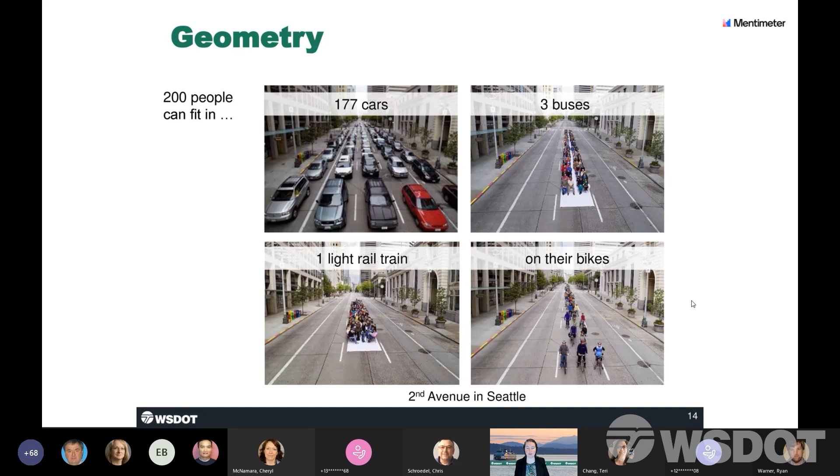Motor vehicles are by far the least spatially efficient form of transportation. All other forms of typical land-based transportation can move the same number of people in significantly less space.

Because of this geometric inefficiency, providing infrastructure that makes driving the most appealing option ironically pits drivers against everyone else who is now compelled to drive due to a lack of other options. Even in corridors with relatively high productivity of other modes, vehicle congestion is psychologically dominant because cars take up so much space.

Another issue with overdependence on driving is all the people who are left behind. There have always been people who are excluded from driving due to age, disability, or cost. These people are often shut out from access to education, employment, healthcare, healthy food, social connections, and more when the main means of access is driving.

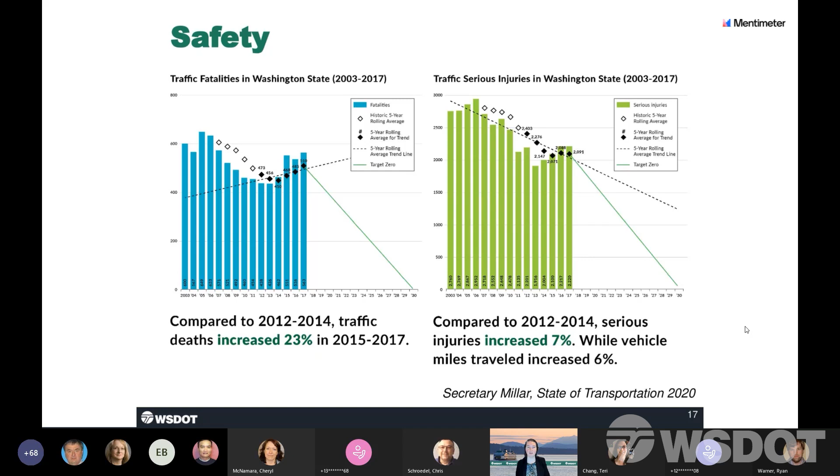Our current vehicle-dominated transportation system also exacts a heavy cost and loss of life. In Washington, hundreds of people are killed by motor vehicles every year. This intersects with equity because those killed are disproportionately people outside of vehicles. In Seattle, for example, only 7% of crashes involve vulnerable users, but vulnerable users make up 89% of people killed.

Speeding is a fundamental factor in this. Statewide, 86% of pedestrians and bicyclists killed occurred on roads with a posted speed limit over 25 miles per hour, between 2010 and 2019.

This loss of life has a huge financial impact. Add to that the cost to build and maintain roadways, parking facilities, vehicles, and fueling systems, and it's clear the auto-dominated transportation system is a very expensive way to provide access.

The economic burdens of auto reliance extend to local communities. On a per acre basis, transportation efficient development, where customers are less diluted by the land demands of large roads and parking lots, has significantly higher economic productivity. This in turn can provide more tax resources for local governments.

Finally, transportation is the single largest source of climate destabilizing greenhouse gas emissions in Washington. Locally, pollution and habitat fragmentation generated by the highway system degrade the health and abundance of natural ecosystems and their native species. The fish passage barrier removal injunction is one example where WSDOT is now working to correct past impacts.

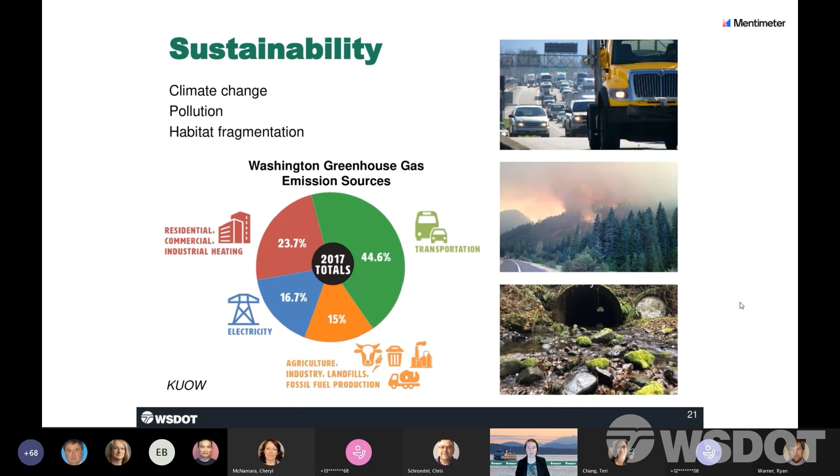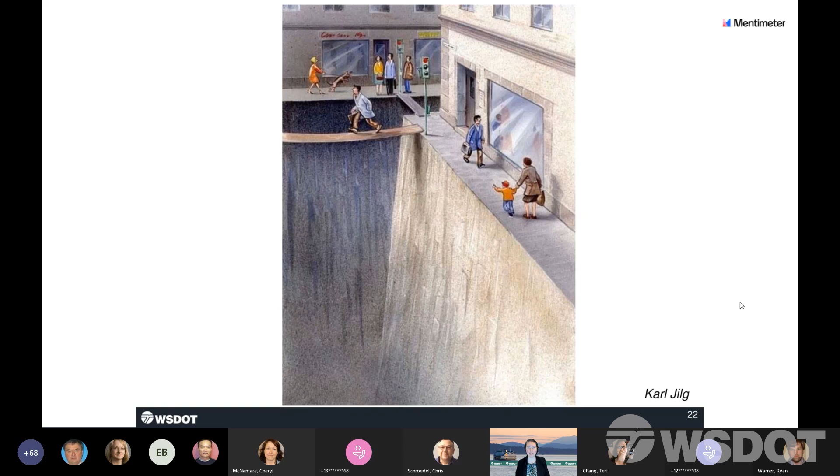Unfortunately, in our efforts to help people drive farther, faster, we've created a lot of places that feel like this.

We can join the global trend and flip our orientation to focus first on creating access through proximity at a human scale.

There are a wealth of local, national, and international examples where the trend lines of population and vehicle growth have been decoupled by shifting which modes form the foundation of the transportation system.

Washington's continued population growth means that development has the opportunity to transform much of our built environment. When land use and transportation are built for humans, not private vehicles, then access and mobility can increase without commensurate growth in vehicle travel.

Transportation trends are made up of the aggregate individual decisions of all the people traveling in our state. People make choices based on their perceptions of the options reasonably available to them and the relative risks and merits of those options. For walking, bicycling, transit, and other more sustainable options to be competitive, there need to be complete networks for these options that are safe and comfortable, and destinations need to be within convenient travel time for each of these options.

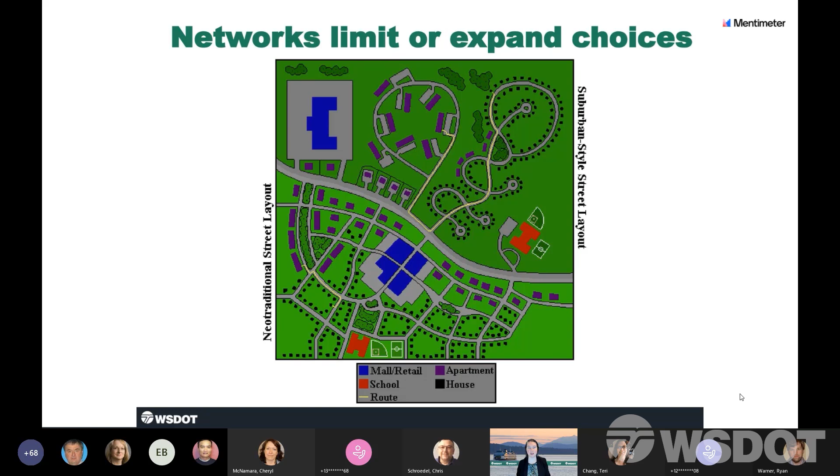In summary, transportation efficient communities provide proximity of destinations, where the locations of different types of uses are designed to maximize the number of people who have the option to live, work, learn, recreate, and meet their daily needs within a walkable neighborhood. Complete, low-stress multimodal networks that provide direct, safe, convenient, and welcoming systems of walkways, bike routes, and transit routes. Appropriate roadway characteristics for context and function, so that vehicle facilities are designed to be appropriate to the places they traverse.

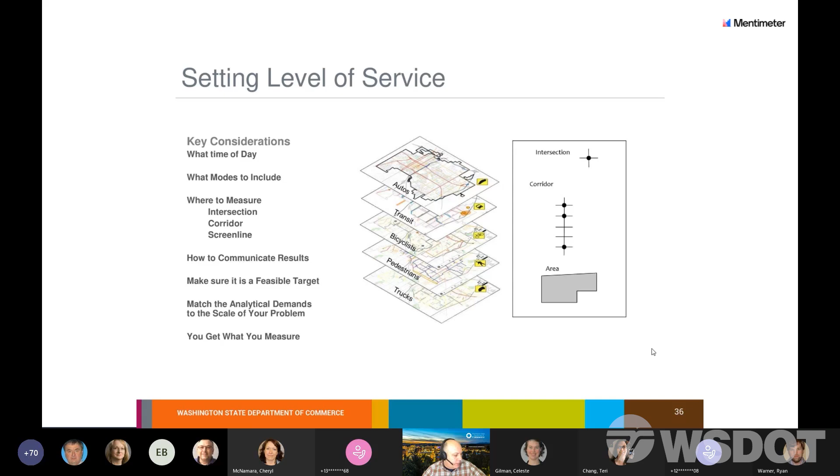The next requirement I want to talk about is the identification of system needs. It's really a question of where do projects come from. As you're developing a transportation element, or a capital facilities element, you need an identification of system needs -- this is where you say, here's what we need to build, or accomplish, over the next 20 years in order to realize our growth strategy.

It's a combination of existing deficiencies, which you get from your inventory, your goals and policies, and external mandates -- for example, the Americans with Disabilities Act says you've got to have curb cuts.

That's a deficiency in the existing system. A new stormwater manual comes out, and your roads are not managing stormwater the way the new manual calls for. That's an existing deficiency, okay?

The other thing you've got to do is maintain the system you already built. So you've got an asset management system, and it says this is the schedule you need to optimize system preservation. That's going to generate system preservation needs.

And then you've got the needs resulting from new growth. That comes from the level of service you've set, your traffic forecast, and your land use system. All of these things combined generate the system needs, and those needs are going to be met through a combination of capital projects, programs you develop, and regulations you develop.

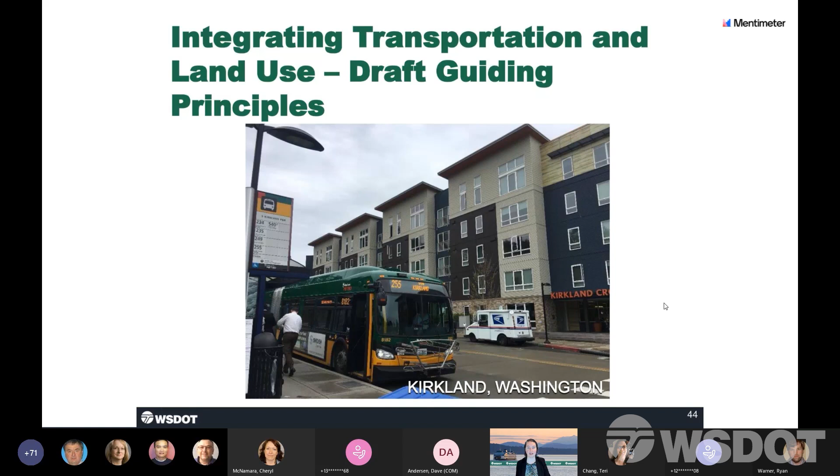Principle 1, remove barriers to infill development. Encourage development that adds to the diversity of origins and destinations. Partner with cities, counties, the Department of Commerce, other state agencies, tribes, and others to proactively remove barriers to adding housing, employment, and services within existing developed areas. For example, by removing requirements for motor vehicle infrastructure, such as parking, vehicle lanes, highway capacity manual level of service mitigations, etc., and through strategic management of curb space. Next slide.

2, reduce environmental and health disparities. Prioritize transportation investments that reduce disproportionately high and adverse human health and environmental effects against historically overburdened communities and vulnerable populations. Harms include exposure to air pollution and other environmental pollutants, crash exposure, disproportionate policing, and restricted access to high-quality employment, education, healthy food, healthcare services, safe housing, arts and culture offerings, and social opportunities necessary to achieve optimal health outcomes. Partner with others to pair provision of affordable housing, transportation options, and anti-displacement actions with investments. Next slide.

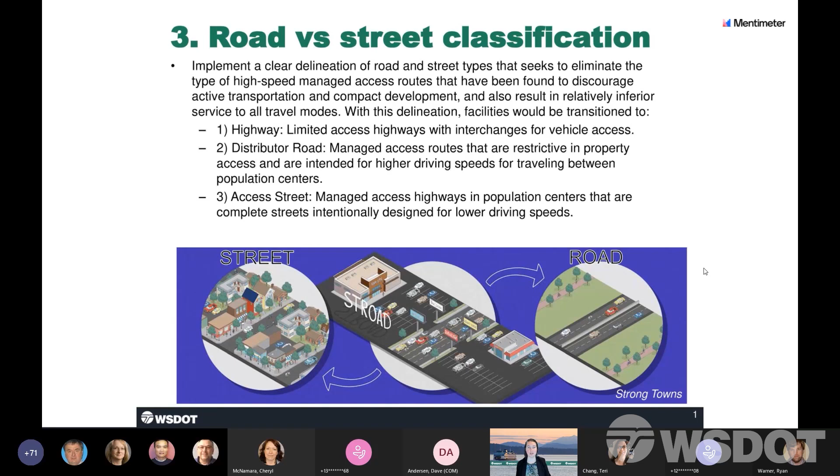3, road versus street classification. Implement a clear delineation of road and street types that seeks to eliminate the type of high-speed managed access routes that have been found to discourage active transportation and compact development and also result in relatively inferior service for all travel modes. With this delineation, facilities would be transitioned to: 1, highway, limited access highways with interchanges for vehicle access; 2, distributor road, managed access routes restrictive in property access and intended for higher vehicle speeds for traveling between population centers; 3, access street, managed access highways in population centers that are complete streets intentionally designed for lower vehicle speeds. Next slide.

4, implement the state's safe system approach. Implement an approach to providing and maintaining transportation facilities that acknowledges death and serious injury are unacceptable, that humans are vulnerable and make mistakes, and takes a proactive approach that incorporates redundancy. On access streets, take proactive measures to encourage lower driving speeds. On distributor roads, provide a greater level of separation and/or barriers to protect vulnerable users. Next slide.

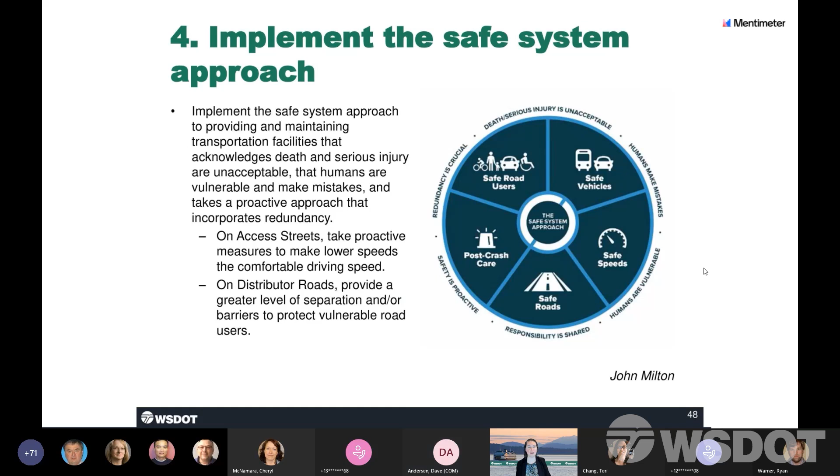5, complete active transportation networks. For all highway projects, including fish passage barrier removal projects and resurfacing projects, identify missing active transportation network links, whether absent or not maintained and operated to encourage safe use, as baseline needs, and improve the active transportation facilities.

Next slide. 6, invite active trips. Maximize walking, rolling, and cycling trip making by providing active transportation facilities that provide users with a low level of traffic stress in accordance with agency policy, such that the performance outcomes are: accessible, designed in accordance with the ADA; cohesive, where all links in the vicinity of the project are present and each provides the appropriate level of traffic stress; direct, avoiding any significant out-of-direction travel for all active transportation modes; safe, developed in accordance with safe system principles; and comfortable and attractive, shaded and shielded by trees, with pleasant noise levels and air quality, and visually interesting settings. Next slide.

7, prioritize transit, HOV, and freight. On all highway types, prioritize the reliability of transit, high occupancy vehicles, and freight over general purpose travel. Avoid increasing risk to vulnerable users by over-designing for large vehicles. Transit functions best when it can quickly and reliably serve destinations located along a linear path, short travel time apart, and surrounded by a high-quality active transportation network. Freight has specific needs that should be considered and addressed, including freight parking, protection of industrial areas from incompatible uses, and reducing the risks of conflicts with vulnerable users. Next slide.

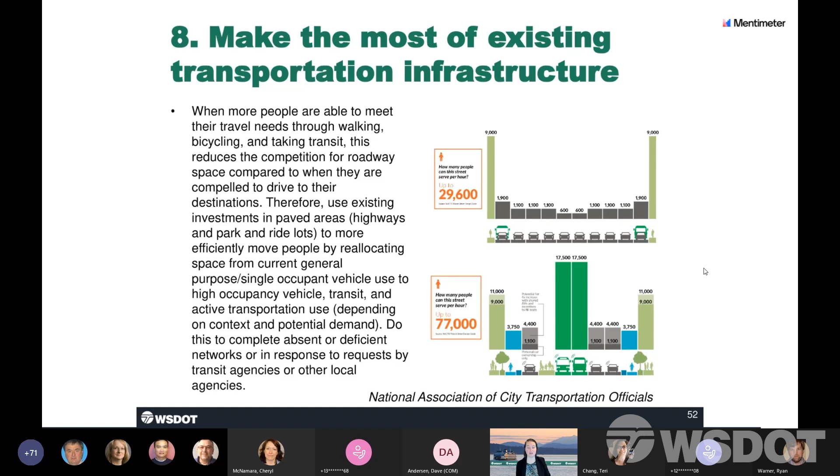8, make the most of existing transportation infrastructure. When more people are able to meet their travel needs through walking, bicycling, and taking transit, this reduces the competition for roadway space compared to when they are compelled to drive to their destinations. Therefore, use existing investments in paved areas, highways, and park and ride lots to more efficiently move people by reallocating space from current general purpose and single occupant vehicle use to high occupancy vehicle, transit, and active transportation use, depending on context and potential demand. Do this to complete absent or deficient networks or in response to requests by transit agencies and other local agencies. Next slide.

Facilitate utilities that communities need. Work with utility providers to advance transportation efficiency and incentivize compact development.

Per RCW 47.44.160, develop a dig once policy that proactively provides broadband facility owners with information about planned state highway projects to enable collaboration between broadband facility owners and the department.

Minimize administrative burdens, delays, and uncertainties associated with utility permits or franchises for infrastructure upgrades in support of densification of development in existing communities to help them become more transportation efficient, and seek to integrate the development of trails that contribute to the overall plan for a complete active transportation network into utility projects and corridors.

Next slide. And this is the 5th video in my Strong Towns series. You don't need to watch the others to understand this one, but it might provide some context.

If you live in the US or Canada, this will certainly look familiar to you. Multiple lanes of car traffic, wide highway-sized lanes, giant signs, traffic lights, parking lots, lots of driveways and side streets with traffic merging in and out, and a place that's nearly impossible to cross as a pedestrian. There isn't even a sidewalk here. These are what Strong Towns refers to as stroads, which is a horrible name, and that's intentional because these are horrible places.

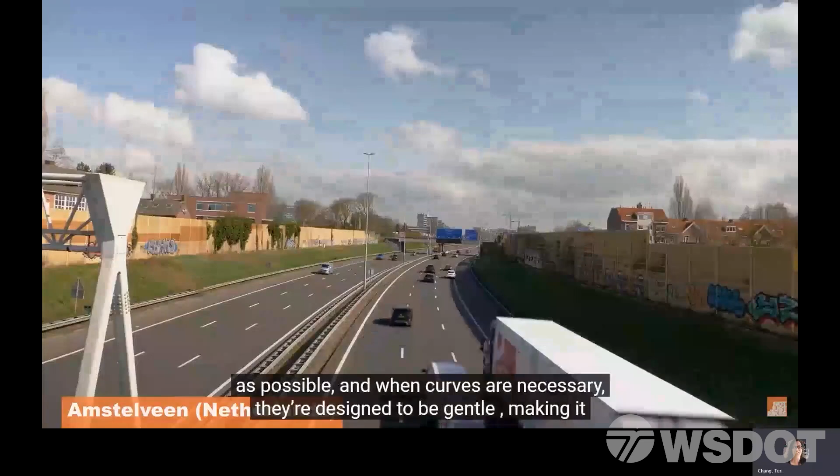This is a road. It is a high-speed connection between two places. Because of the high speeds involved, there are several safety features. The lanes are wide and forgiving so that vehicles do not bump into each other. The road is as straight as possible, and when curves are necessary, they're designed to be gentle, making it easy to drive along. The area next to the road, called the clear zone, is free of any obstacles that could be hit, just in case a vehicle runs off the road.

The signs are very large, designed to be read from a distance and at high speeds. Entrances and exits are few and far between because the road is designed to keep vehicles at a high speed for as long as possible to minimize travel times. Roads are important. We need roads, though I personally prefer my roads to have rails.

This is a street. It is a complex environment where life in the city happens. Buildings are placed right next to the sidewalk to be easily accessible by people walking, and it gives a sense of space, almost like an outdoor room. This is a place that feels comfortable to be in, so you find people here.

There are many entrances and exits to and from the street, and there may also be street parking for vehicles and deliveries. This is an environment meant for slow speeds because this is a destination, not a thoroughfare. High-speed traffic is not compatible with lots of human activity, so vehicle speeds are reduced.

Everything on the street is at a human scale. It's designed to be inviting, encouraging people to walk, to window shop, or to just sit and watch the world go by. The street is designed to get the most value out of the space available. Streets are very important, and we definitely need streets.

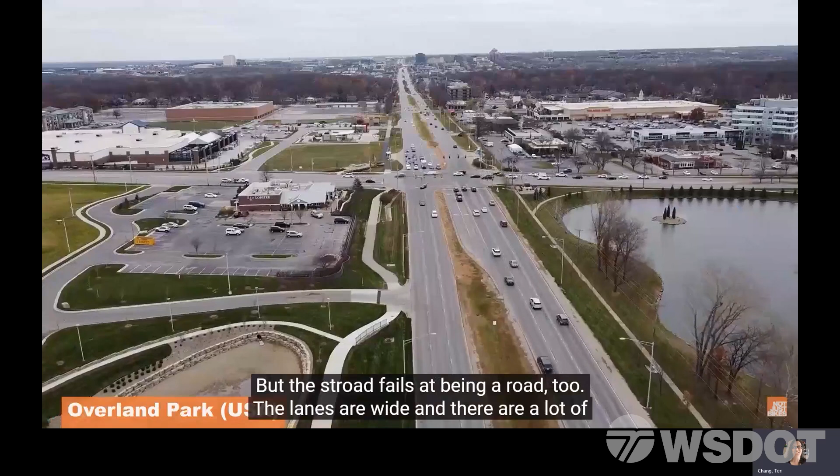But the stroad fails at being a road too. The lanes are wide and there are a lot of them. You're surrounded by asphalt, but you can't actually get anywhere quickly like you can with a road. There are cars constantly changing lanes and going in and out of the stroad, slowing down traffic and introducing many points of conflict that require drivers to constantly slow down to avoid a collision.

Traffic volumes can be quite high on stroads because there are no viable alternatives to driving. Distances are too far to walk and it's too unsafe to cycle. And since public transit gets stuck in traffic anyway, only the poor and the desperate will take the bus. So everyone drives. But because there are so many crossroads, entrances, and exits to the stroad, traffic lights are required, meaning drivers are constantly stopping at red lights. And because speeds are high, light timings need to be very long, leading to traffic signal-induced congestion. Nobody is getting anywhere quickly on a stroad.

All of these elements make stroads unsafe as well, and the majority of fatal crashes within cities happen on stroads. They are especially dangerous to people walking and cycling.

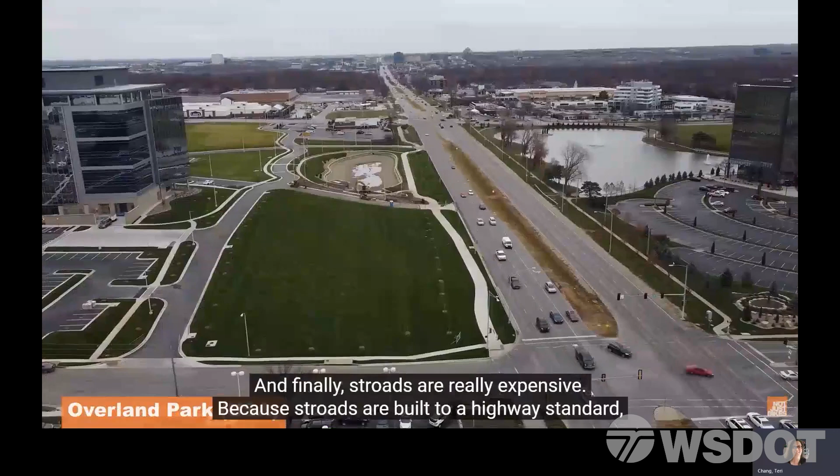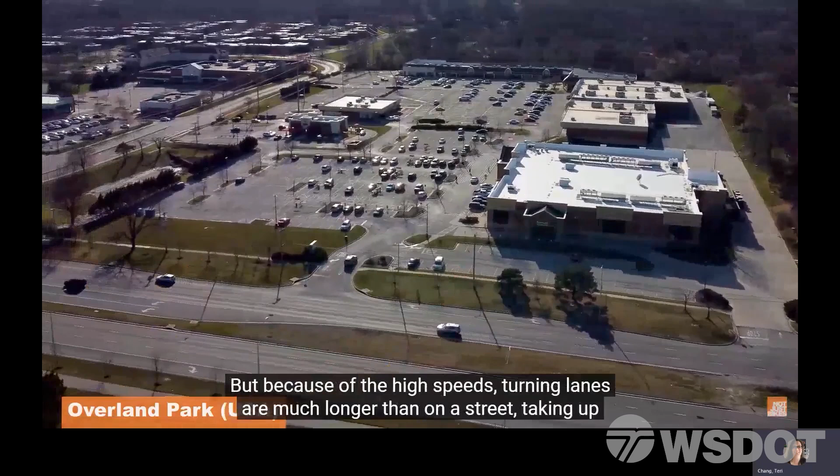And finally, stroads are really expensive. Because stroads are built to a highway standard, their lanes are very wide and there are never less than 4 lanes. Plus, there's normally extra space for shoulders and clear zones at the side of the road too. Because stroads try to be streets, there are many entrances and exits, so many turning lanes are required. But because of the high speeds, turning lanes are much longer than on a street, taking up even more space.

And as traffic increases even more, due to traffic entering and exiting the stroad, the city will install another traffic signal for $750,000. All of this means that a stroad is much bigger than a road that would carry the same amount of traffic, and significantly larger than a street that would have the same number of businesses and houses along it.

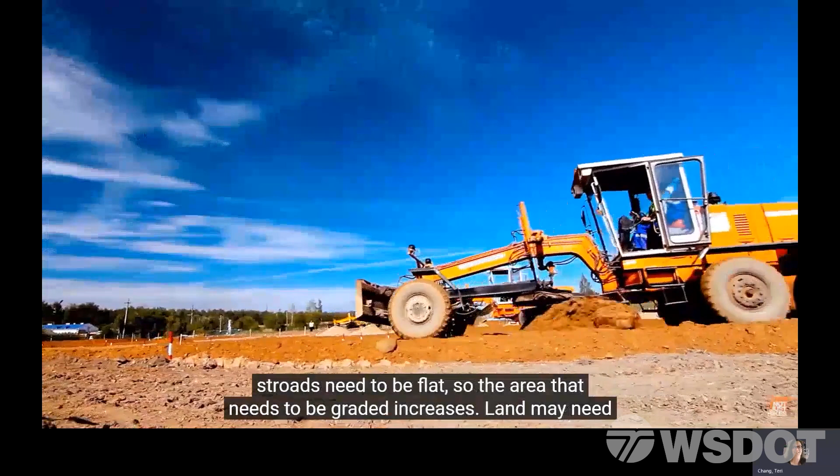As the size of the stroad increases, there are several other costs incurred. High-speed stroads need to be flat, so the area that needs to be graded increases. Land may need to be purchased from residents to widen the stroad and destroy their property values. By the way, do you think this girl is waiting to cross this 5-lane stroad?

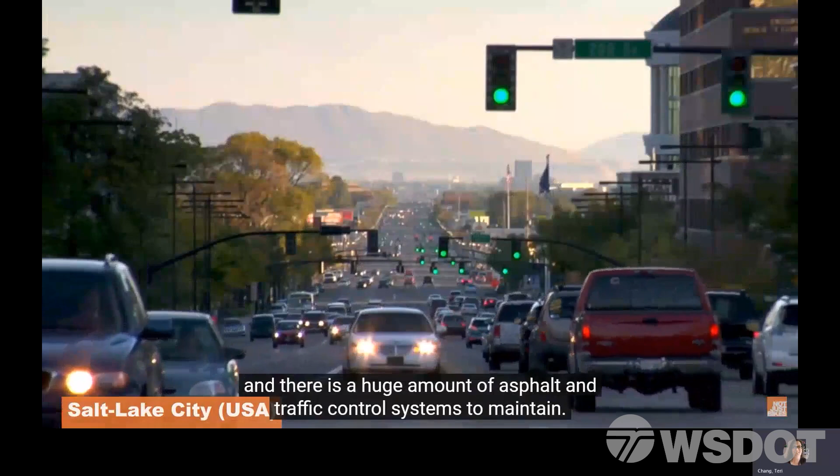Flood protection infrastructure becomes much more expensive due to the impermeable surfaces, and there's a huge amount of asphalt and traffic control systems to maintain. And of course, because everyone drives, large parts of the landscape need to be dedicated to parking lots, meaning everything is inherently spread out in low density. Parking lots don't employ anyone, and they don't earn much tax revenue either.

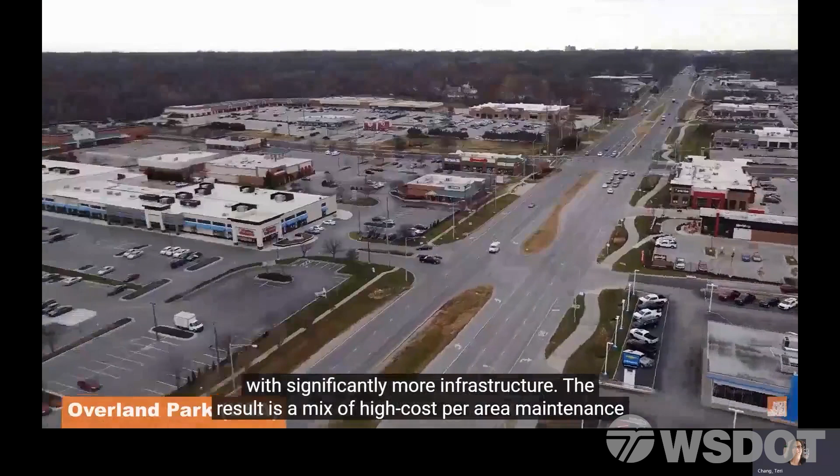A stroad environment is significantly less financially productive than a street, but with significantly more infrastructure. The result is a mix of high cost per area maintenance expenses combined with low value per acre tax revenue, which makes these stroad environments a net negative for cities. These places are literally putting American cities on the stroad to financial ruin, and they're doing it while being dangerous, ugly, and ultimately ineffective at actually moving people.

The stroad fails at every metric, but it's the default setting for transportation design almost everywhere in the US and Canada. So what's the alternative? Well, Strong Towns advocates for one of two things.

First, you can convert a stroad into a road. This means limiting access to the stroad, accessing businesses and neighborhoods from side streets. Painted bicycle gutters need to be removed because moving vehicles is the primary objective of a road. People can still walk or cycle, but these paths need to be completely separated from the flow of traffic. In this way, the stroad becomes a road, a high-speed connection between two places.

The other alternative is to turn the stroad into a street. For this, the lanes need to be narrowed and parking needs to be moved to the curb or behind buildings, and the buildings themselves need to be built closer to the street. Everything needs to be brought down to a human scale, making it inviting to people and getting more value from the space available. This isn't a hypothetical, and we don't have to imagine what this would look like, because the Netherlands has already done it, just with 3 types of infrastructure instead of the 2 proposed by Strong Towns.

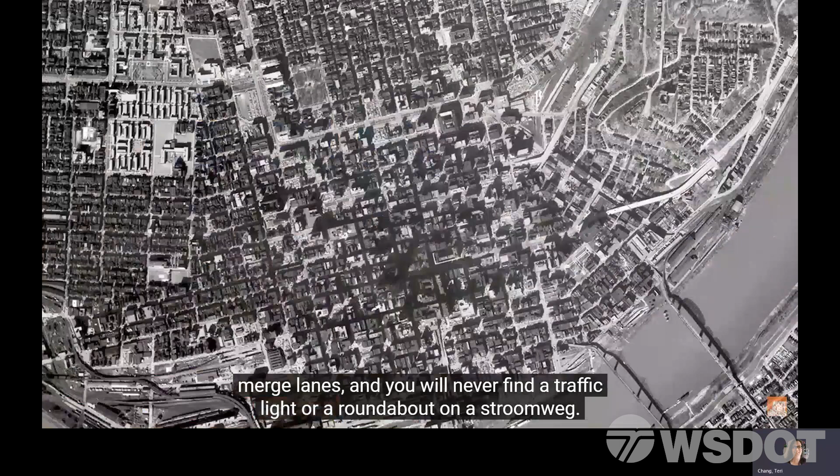Highways should also go around cities and never through cities. I'm looking at you, Cincinnati. Actually, that's not fair, because basically all American cities did this. Thankfully, the plan to do this to Amsterdam was unsuccessful.

Moving one level down is the Gebiedsontsluitingsweg, the distributor road. These are the connectors between highways and streets. There may be entrances and exits to other streets and roads, but driveways to houses or businesses are avoided as much as possible. If traffic controls are necessary, then roundabouts are preferred, unless traffic volumes require a traffic light. I'm going to refer to these as roads.

Finally, there's the Erftoegangsweg, the neighborhood access street. These are the end destinations for journeys, the places where people live, work, shop, relax, and so on. I'm going to refer to these as streets.

Streets are designed to be low speed with a speed limit of no more than 30 kilometers per hour, and they almost never have more than one motor vehicle lane per direction. In many cases, vehicle speeds are slow enough that separated bicycle infrastructure is not required, though bicycle paths may still be used to purposefully narrow the street, constraining the space available for motor vehicles.

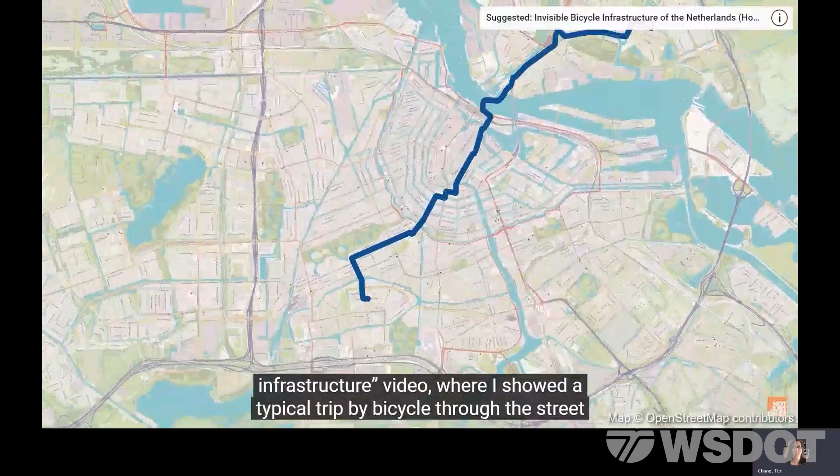The street network is designed to discourage through traffic by cars, either through traffic calming or by explicitly blocking cars, while still allowing walking, cycling, and public transit to take the most direct route. I've talked about this before in my invisible infrastructure video, where I show a typical trip by bicycle through the street network compared to the very different route by road that is taken when driving.

Once you learn about these three types of road in the Netherlands, what I'm unofficially calling highways, roads, and streets, it's really interesting to drive around and see which type you're on. This is a street. This is a road. This is a street. This is a road. This is a road with streets on either side to access houses.

Since this is a relatively recent concept, only implemented about 30 years ago, the best place to see this in action is in newer developments. Here we are driving on a road outside the town of Nieuwleusen. This road is designed to move vehicles, so there is no direct access to adjacent properties. The homes and businesses are accessed by streets on the right and left side, and the road is mostly accessed by roundabout.

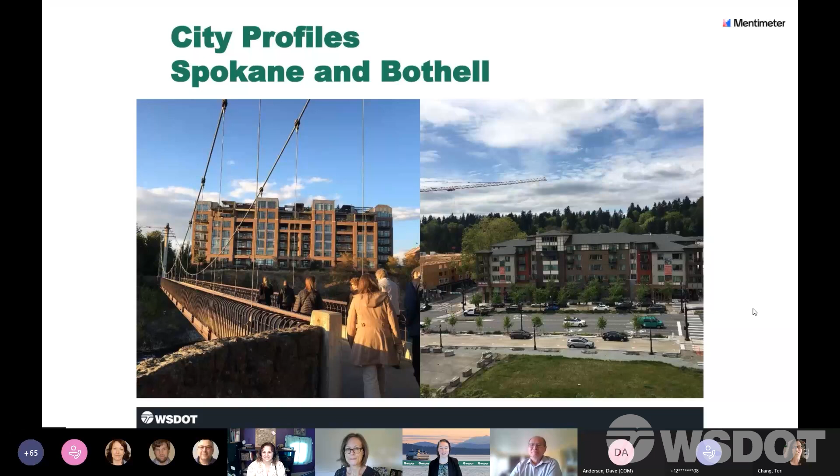Really, the presentation to this point has set up exactly what I'm going to share, a few slides and a little bit of information on the work we're doing in the City of Spokane regarding land use and transportation. We can go to the next slide.

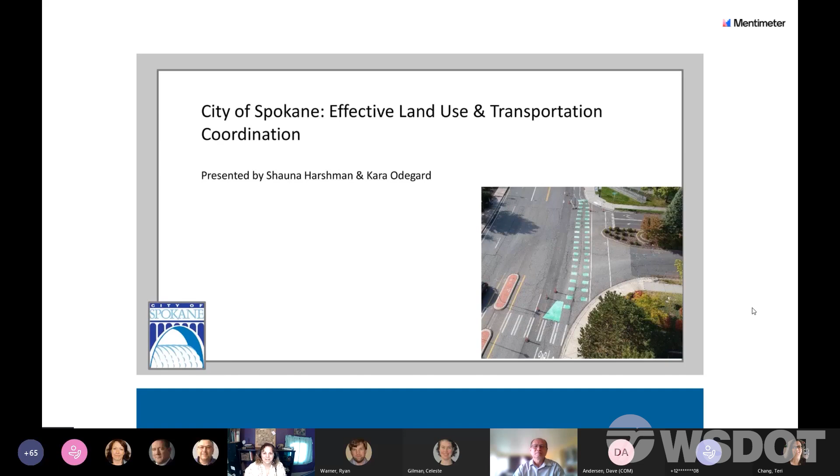Dave did a great job highlighting the nexus opportunity between those different plan types and implementation. Foundational in the coordination between land use and transportation really starts with our comprehensive plan, which adopts by reference both our master pedestrian and master bikeway plans, so we're integrating both our land use policies and multimodal transportation policies at a very high level.

So currently, the City of Spokane is focusing quite extensively on transit-oriented development. A few projects to highlight on transit-oriented design, with an eye towards complete streets, that the city is working on right now.

One on the left of this screen is the Cincinnati Greenway. The City of Spokane has been doing quite a bit more greenway work over the past 2 years with the guidance and support of our Bicycle Advisory Board, so we're really looking at integrating automobile and bicycle users of street facilities and locating those in residential neighborhoods where they make sense, paying attention to that context.

In terms of complete streets and additional coordination, I wanted to highlight one opportunity we developed downtown on Post Street, which is essentially a street used as a pedestrian alley with bollards. We often program that space, and when it's not being programmed, it's a local access street. Here's what that looks like activated.

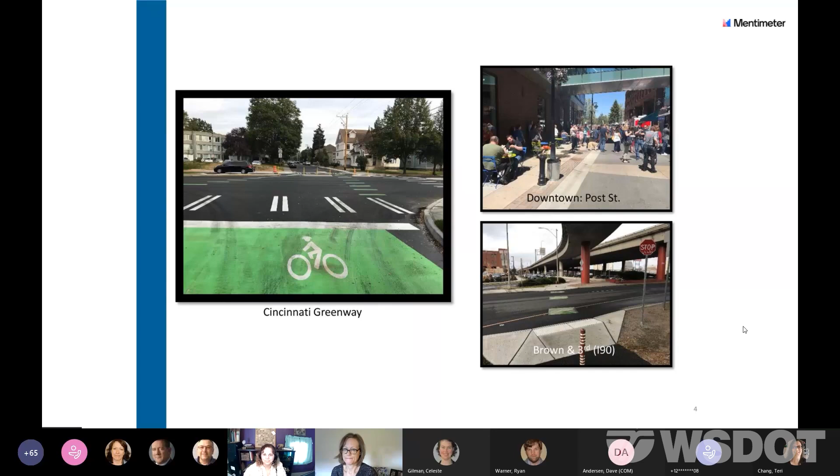We wanted to share this little piece with you, and this will be going through some modification as the City Line, the high performance, high frequency transit line through central Spokane, comes through, but that will be in the future, and we'll still maintain many of these elements. Next slide.

Could we go to the next slide? Sorry, I'm clicking, there must be a lag. That's okay.

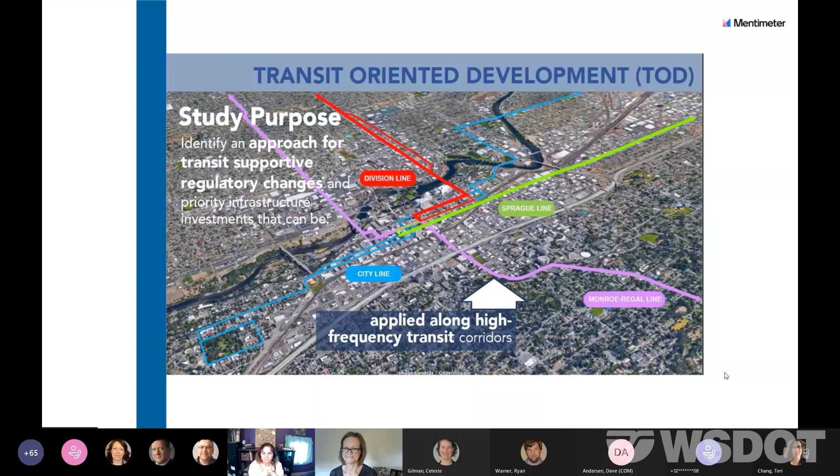Since I was just talking about Division Connects, I wanted to throw in this slide of the project area. It's a very large corridor that we are attempting to reimagine - that better land use and transportation connection to transform it from about a 3-mile strip mall into something that has meaning and vision and value for more people in our community.

So what's next for the city of Spokane is finishing up a couple of these studies, digging into the policy that Dave mentioned to really meld together the policy with the implementation and those projects to move forward. That's what we're going to do entering phase 2 of Division Connects.

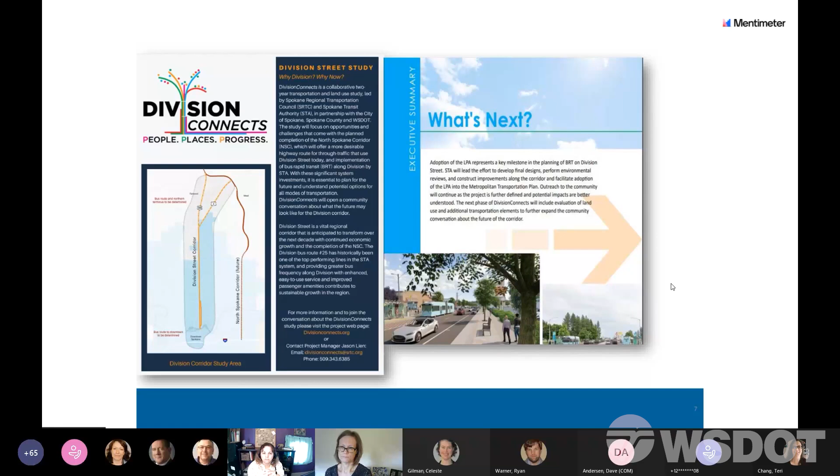We're entering a second transit-oriented development study in another area of town, and we are going to continue to build out those studies and begin to build those facilities to implement that vision. Next slide.

So not everything is rosy. We're doing good work, we're making good progress, but as all of you know, we always want to do more, always want to be better. In that spirit, since we're here with WSDOT, one of the facilities we could collaborate on the visioning and redesign of is really Spokane Falls Boulevard and Division.

I think these diagrams or pictures with the arrows really highlight what some of the challenges are here: wide lanes of traffic, multiple lanes of traffic coming in from 3 different places, a bicycle lane where - I'm not sure where it goes - and where are the pedestrian facilities? How do they get us to where we actually need to go in relation to all of these activity centers?

On the right-hand side of the picture on the left, you'll see that's the convention center. So this is in the urban core downtown, where we have a tremendous number of visitors, tourists, and activity. We've got a highway facility coming into downtown that we're trying to balance all of these elements in.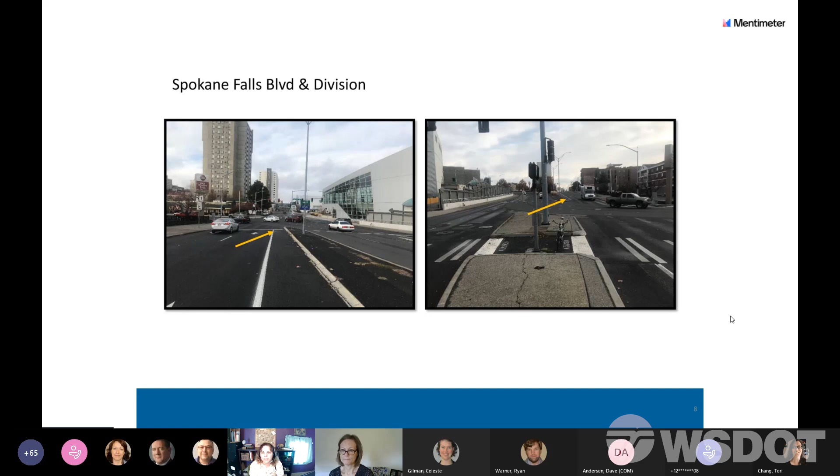I think that is the last slide, but there may be one more. Nope. We just wanted to reiterate, Karen and I did, that our goal in the work we're doing to integrate transportation and land use at the city really rests right here: walkable, livable, sustainable communities for everyone in our community. Until we get to that, we still have work to do and collaboration to move forward on. So I think I kept that fairly tight. If we have questions now or at the end, I'm not sure how you want to handle that.

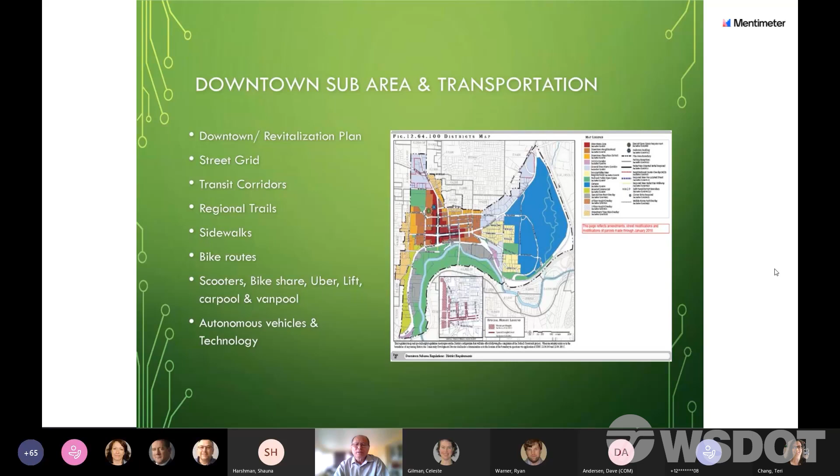This map shows where the city started with $200 million of investment on infrastructure, including street, water, sewer, and all the other facilities. That spurred more than $800 million of private development in the downtown area, as you can see the map is all scattered with developments. In terms of statistics, the update on the downtown sub-area plan calls for 2,750 new dwellings, and as of today we have 1,900 dwelling units built. It calls for 400,000 square feet of retail, and as of today we have 170,000 square feet of retail built. It calls for 250,000 square feet of office, and as of today we have 150,000 square feet built.

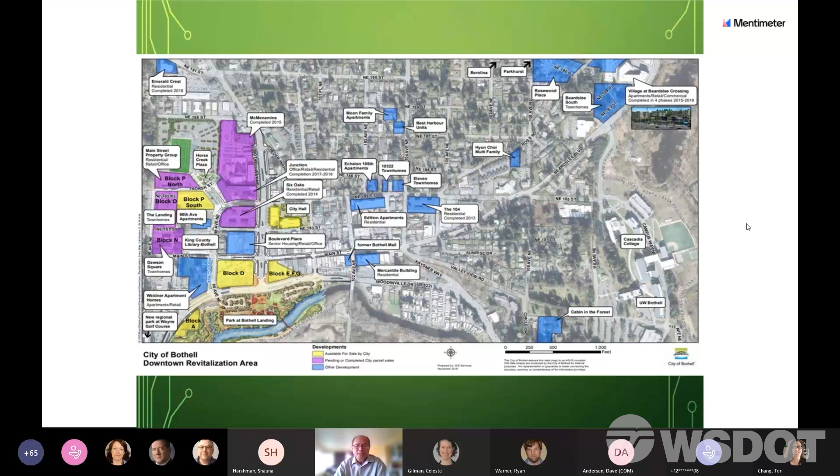Next slide, please. A little bit about the transit that the city has leveraged in our effort, because we can't build more lanes, and we're trying to use transit as a way for the future. So we have the Sound Transit investment coming into Bothell. As you know, the voters in this area approved over $50 billion of package of regional transit for Sound Transit.

We also have the other two BRTs coming to town: the King County Metro Transit RapidRide, and the Community Transit Swift Line.

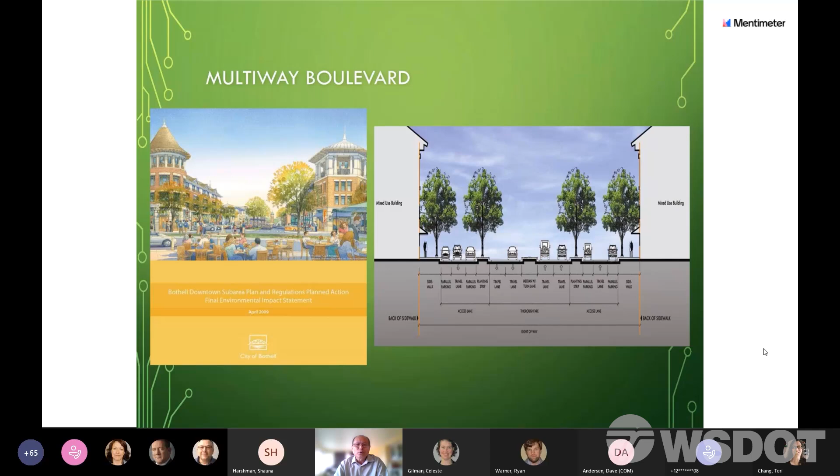Here's a bit more about what the corridor looks like - this shows the artist's rendering, and the next slide shows what has happened since the comp plan was adopted. It shows the multi-way boulevard running left to right, with the street trees, the lower slow lanes, and the parking lane along the main thoroughfare.

This one talks about the historic Main Street, the second concept the city did as a complete street. The focus there was the flex zone for Main Street, and it's important to retain this historic nature while revitalizing and redeveloping the remainder of downtown.

Unlike the multi-way boulevard, this concept has a flex zone which allows parking to also be converted for use as an expanded zone for sidewalk cafes, dining, and other activities. There's a much wider sidewalk, a 2-lane roadway, and very slow traffic in this downtown environment. Other features include planter boxes, street trees, bike racks, and wayfinding kiosks along this historic downtown.

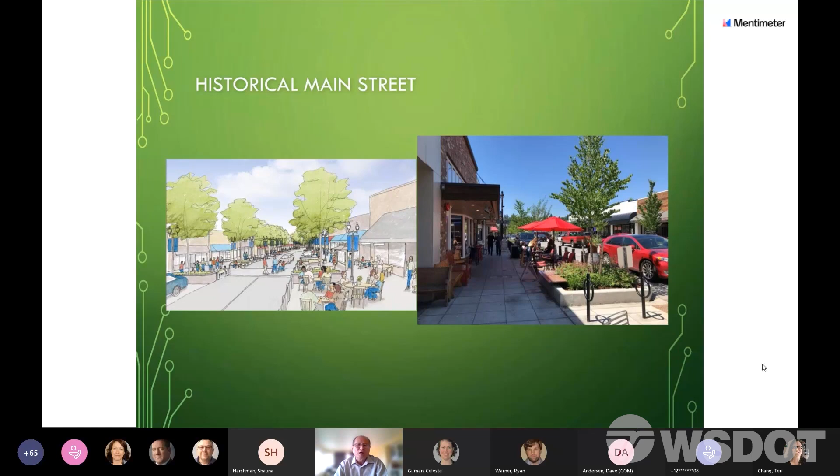The Main Street is closed periodically for street fairs in the summer in Bothell. We have special events like the 4th of July parade, Oktoberfest, and Christmas holidays, and so on.

This shows what happened with development along the multi-way boulevard, where we transformed Anderson School into something much more - it's got a theater, hotel, and brew pub, and it's a very active development with the McMenamins. This was very important to Bothell as well.

This shows another development along the multi-way, across from City Hall.

And the last slide shows some mixed use development that redeveloped the area basically across from the University of Washington Cascadia College.

So this pretty much concludes my presentation. Thank you for listening to Bothell's story of small town perspectives with big plans, but some ideas to make a small town come alive with non-traditional transportation ideas. That concludes my presentation. If there are any questions, feel free to forward them to me. Thank you.

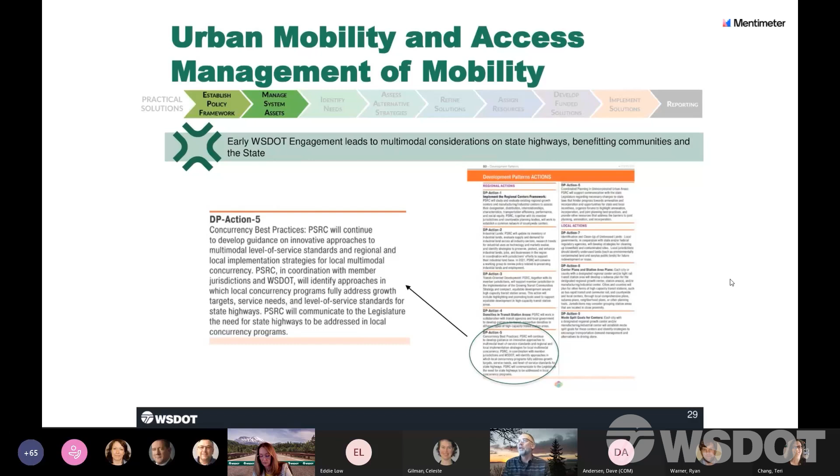In a continuation in the same office, they're working on considerations of land use characteristics and traffic models. If anybody on the call is a traffic modeler, you'll know what I'm talking about. The four-step model is pretty basic, but what they're doing in the Management of Mobility Office with PSRC is looking at off-model or post-processing the four-step modeling process to include the 5 Ds of built environment: development density, land use diversity, street network design, destination accessibility, and distance to transit, none of which typically are in four-step models.

In the south central region of the state, south of Yakima, the West Powerhouse Road Vicinity Corridor Study is a process where the South Central region is commenting on SEPA applications and collaborating with partners on planning studies to set the stage for multimodal solutions.

The Yakima Council of Governments is partnering with the City of Yakima, Yakima County, and WSDOT on a study to examine traffic issues in the West Powerhouse Road vicinity. The area is confined by, if you've ever been there, an interesting geography with very steep cliffs, the Cowiche Creek and Naches River valleys. It's mostly mapped floodplain, so there are a lot of constraints. The land uses right now are major commercial shopping, medical, office developments, remnant orchards, and areas zoned multifamily residential, so a lot of transition is occurring.

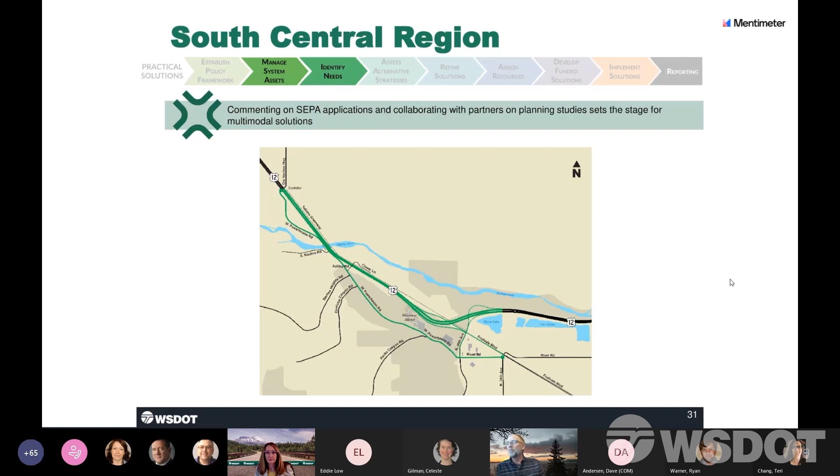The regional Greenway trail passes through the study area, as well as the existing Cowiche Creek Canyon Trail and the planned William Douglas trail, but there are missing connections.

Moving over to Lori's region in Kelso, there's a proposed road diet in the Kelso couplet with bike lanes and pedestrian enhancements, kind of like a real street. Collaboration with partners is leading to active transportation solutions and funding, which is really exciting. The outcome of this work is successful collaboration with the Cowlitz-Wahkiakum Council of Governments, Kelso, Longview, and Cowlitz County, and they have been awarded a pedestrian-bike grant to actually implement it.

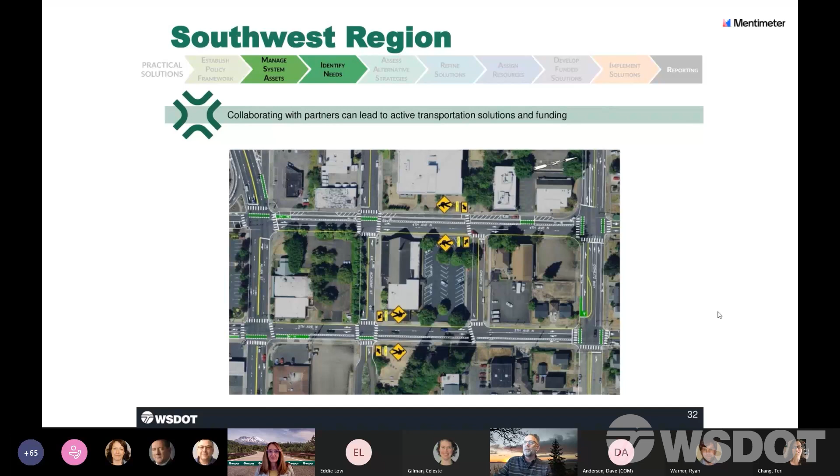Back in the eastern region, another conundrum, a difficult situation. This is the West Plains Transportation Management Area, Phase 1. Multi-agency collaboration leads to practical solutions. US 2, as you can see in the graphic, is a long linear east-west road that has been identified in a 2013 joint study with WSDOT, Spokane Regional Transportation Council, and the University of Washington as one of the fastest growing places in the state of Washington.

This rapid land use development along US 2 has occurred without concurrent supporting multimodal transportation networks, so it's a big STROAD - new language to get used to. The US 2 corridor isn't able to accommodate the trips that will be generated from all the land use in the 2040 land use development plan. So Spokane Regional Transportation Council, in partnership with WSDOT, City of Airway Heights, Fairchild Air Force Base, City of Spokane, Spokane Transit, Spokane County, Spokane International Airport, the Kalispel Tribe, Spokane Tribe, and others - a long list of partners involved - identified a range of practical solutions, including local networks, meaning local network streets, to provide alternative routes and increase mobility in and around SR 2.

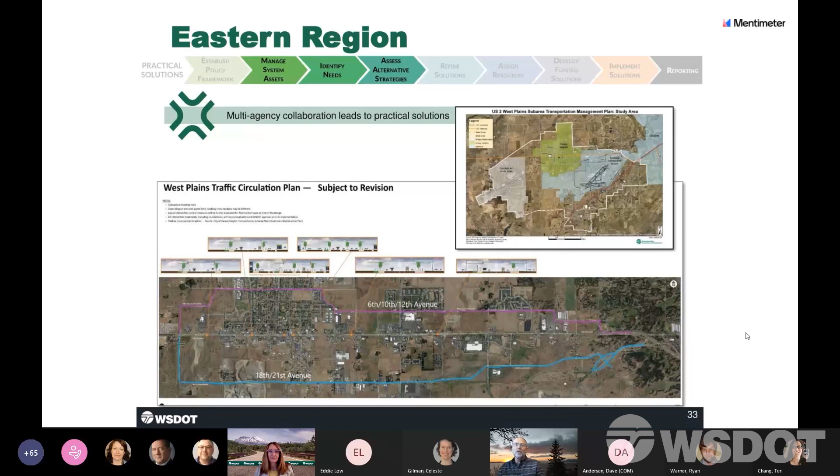It's happening up in the north central region as well on US 2 - the Upper Valley Transportation Study and Active Transportation Solutions to address growth in mobility demand. WSDOT has worked with local agencies from Coles Corner to Cashmere on a planning study to identify vehicular, transit, and active transportation solutions to congestion problems without the need for costly, infeasible lane expansions. The resulting document provides a roadmap for addressing both present and future transportation challenges arising from growth in the region.

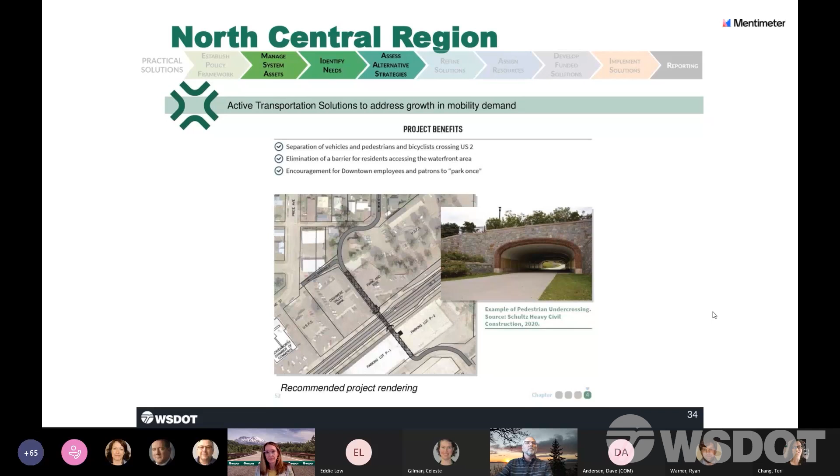My final slide here is an interesting conundrum, heard a lot about it at Secretary Millar's roundtable. It's a classic situation where US 195 and I-90 come together and growth is occurring to the south. The study is improving and building local alternative routes to accommodate trip growth from land use development. This rapid land use development along the 195 corridor has occurred without a concurrent supporting multimodal transportation network. Another theme here: everything's relying on the state highway. US 195 intersections and the I-90/US 195 merge will not be able to accommodate the trips projected from this land use into the 2040 timeframe.

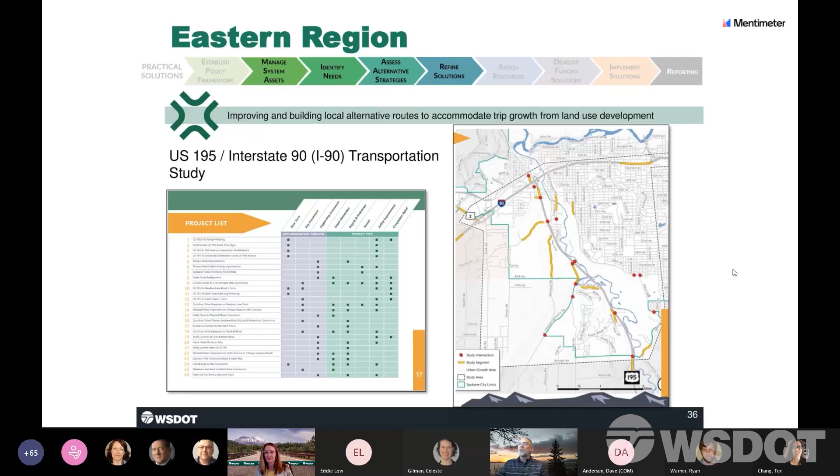So now I'm going to leave this to Lori to take over from here.

Okay, thank you, Todd. We're going to start in Southwest region. This project is SR 142 ADA improvements. It's a plan for multimodal improvements in the community of Klickitat near Lyle, with bike and pedestrian safe crossings emphasized, connecting to the trail.

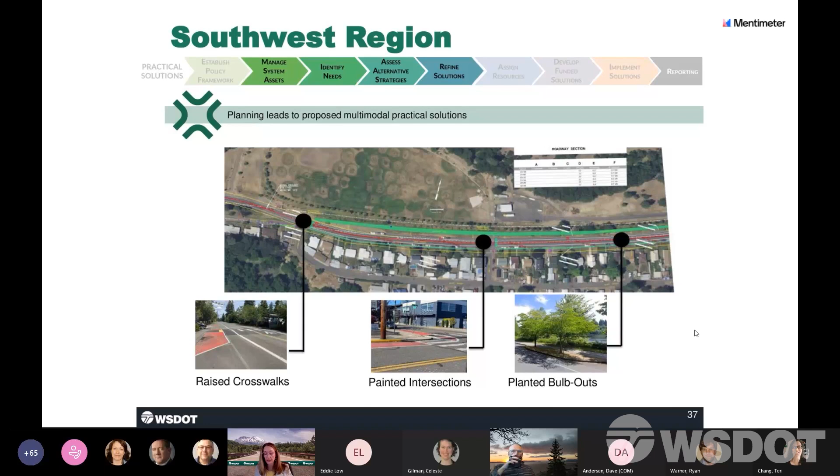Next slide, please. Next one is urban. I have on my slide, Northwest region. Is the graphic the same? Let me see, I've got it kind of behind the screen. Yes, okay, this is a different heading. Sorry about that. Thank you, Teri.

This is City of Arlington. WSDOT worked with the City of Arlington on a planned action EIS. It's a good example of collaboration to streamline land use processes and fund multimodal improvements.

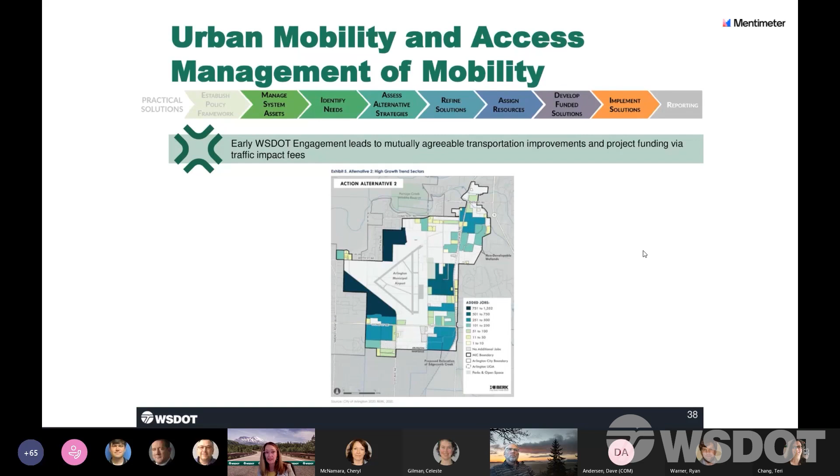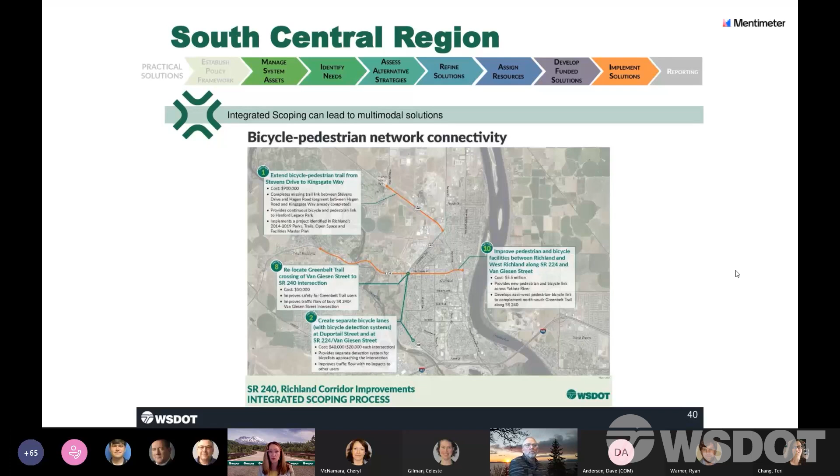Next slide, please, we're going to South Central region. This was work between WSDOT, the City of Richland, and the Benton Franklin Council of Governments to identify multimodal improvements to SR 240.

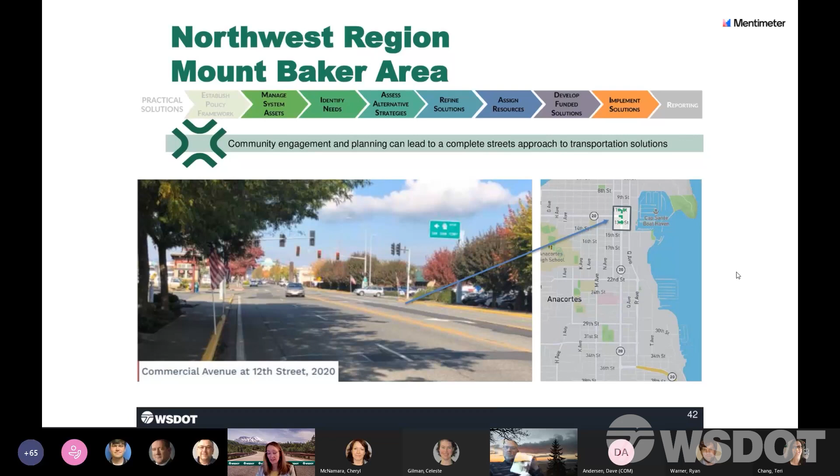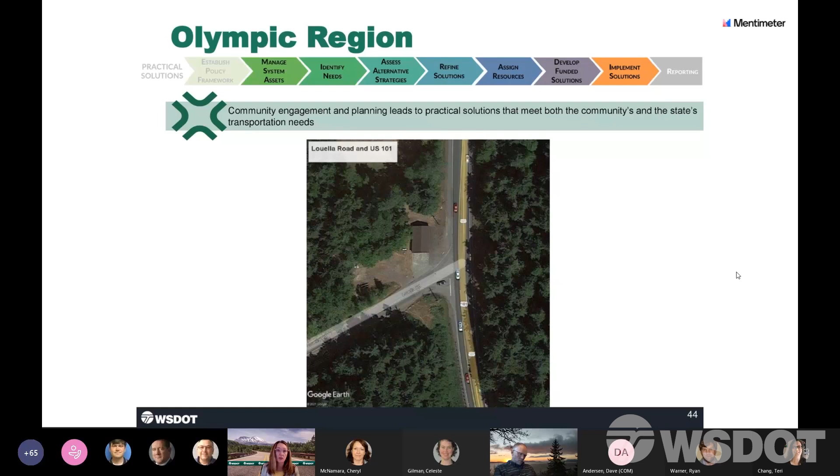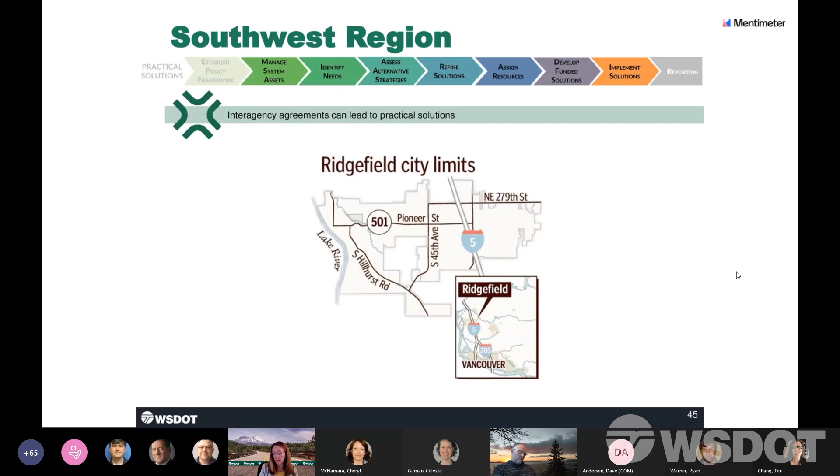We are ending in Southwest Region with the City of Ridgefield. Several years ago, the City of Ridgefield worked on an interagency agreement governing the future look and feel of SR 501 from Interstate 5 to downtown Ridgefield. As parcels developed, this agreement governs the improvements that the city will ask for from developers, giving them certainty. And that concludes my part of the presentation, thank you everyone.

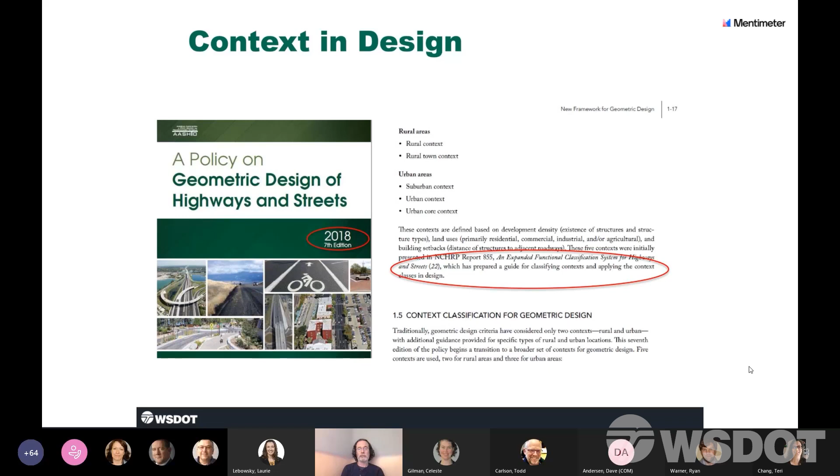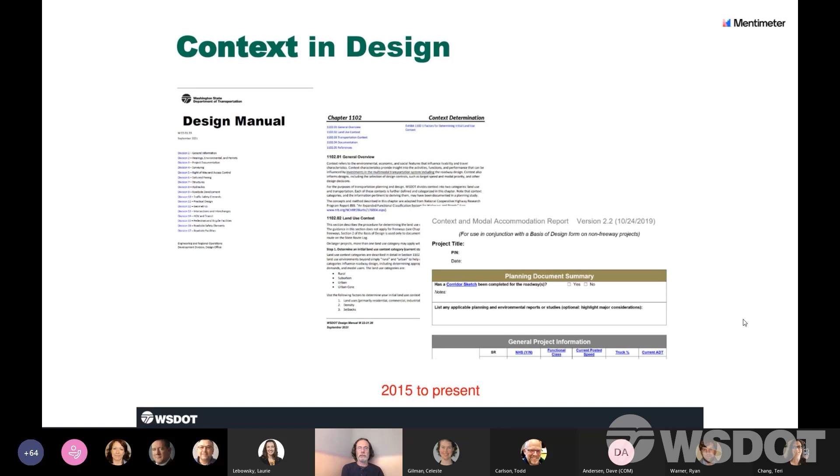Starting in 2015 with an update in 2017, looking at 855, we documented a process in chapter 1102, and actually 1103, and developed a template for that documentation, known by its acronym CMAR - Context and Modal Accommodation Report. You might hear that phrase around. It's meant to be a place to capture information about context and is attached to another more central documentation product we use called Basis of Design.

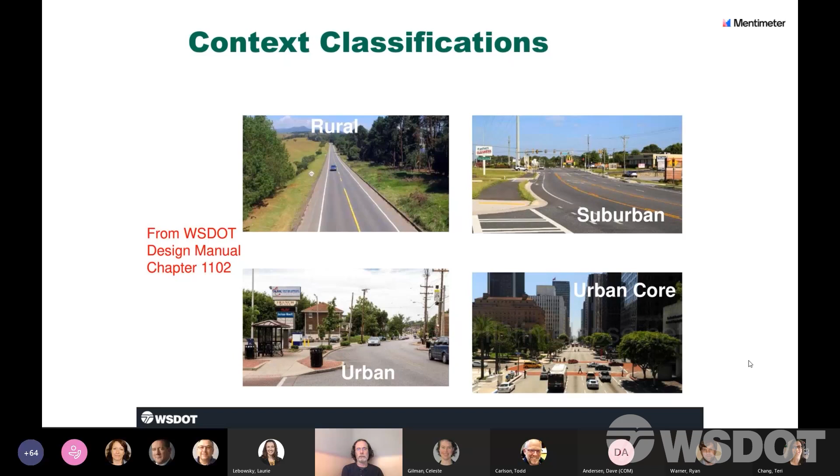Coming out of 855 - and I keep referring back to that - captured in chapter 1102 are 4 context classifications. What we've introduced, and I'll cover in the next couple of slides, is a more or less quantitative process for identifying which context you're in, and then what to do with that. So you see the 4 there - hopefully you recognize those from the pictures.

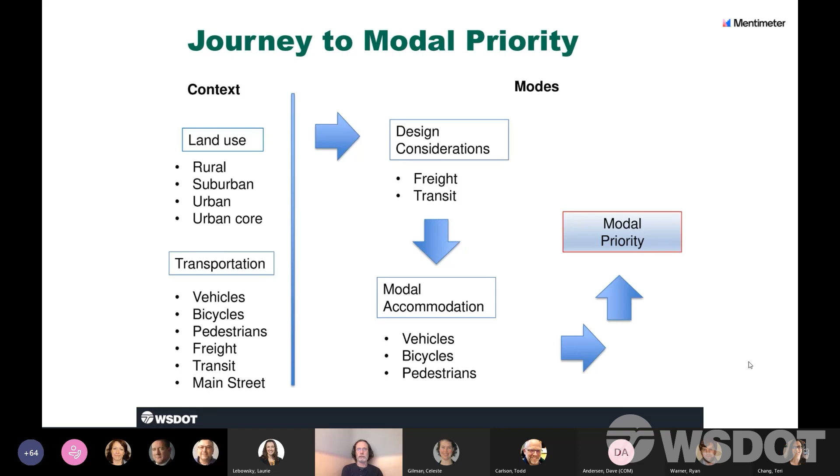The way we use it is - where we depart a little bit from 855 - we use context a little specifically here at WSDOT to try and figure out what to do with design control. That's our language on the design side - we call it modal priority. We utilize something 855 does, which is establish a modal accommodation level. So you see our flow chart there: on the left is the context work, then we get into some information about modes, etc. This output is called modal priority, which gets you over to the design side and Basis of Design, in the red box.

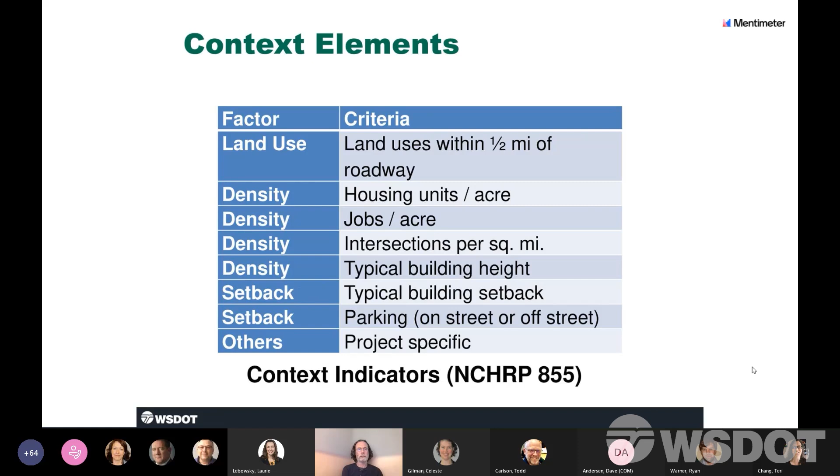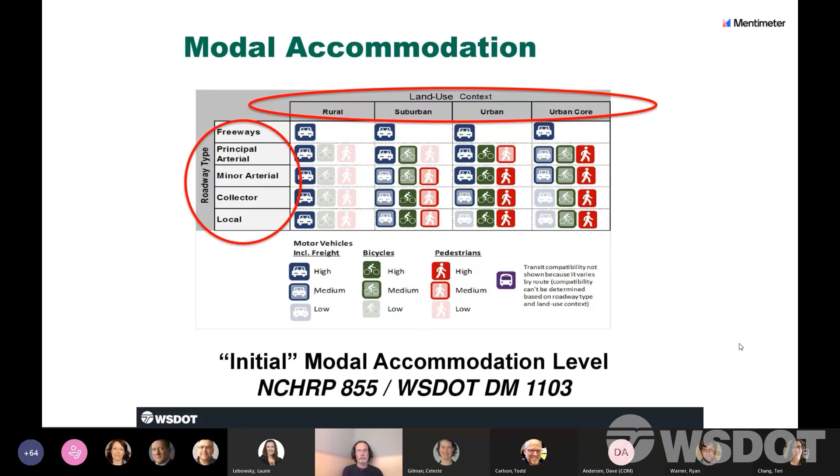Here's where the payoff is. Once you get to modal accommodation, you've made some decisions. There's a high need to accommodate bicycles, a high need to accommodate pedestrians. That's documented now in the CMAR. You move that information over to basis of design. We turn that into priority language, which is kind of legacy from our process in 2015. In any event, now you move into designing.

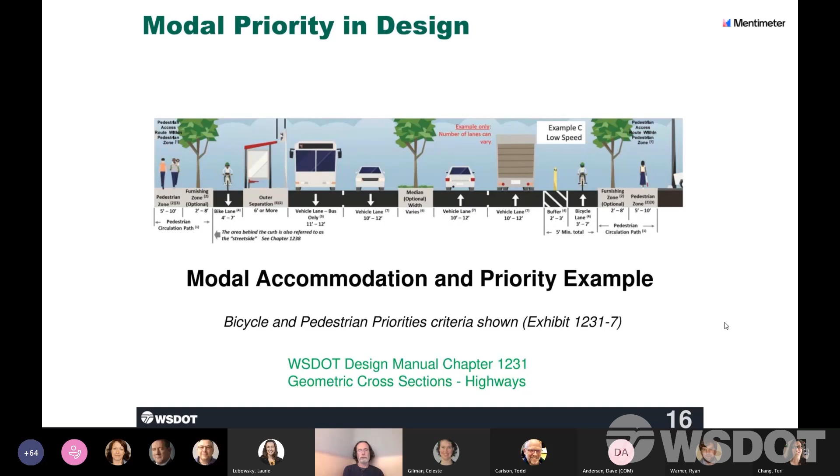So we have a number of these cross sections published in chapter 1231, our cross section chapter for regular highways, not freeways. There's a whole bunch of these, I don't remember how many, six or eight. So you start to plug in, here's the features I'm going to include in my highway design, and here's some dimensions I'll start applying. Now I have the justification documented on CMAR for why, particularly why I'll be spending more money, or reallocating money and cross-section to other modes.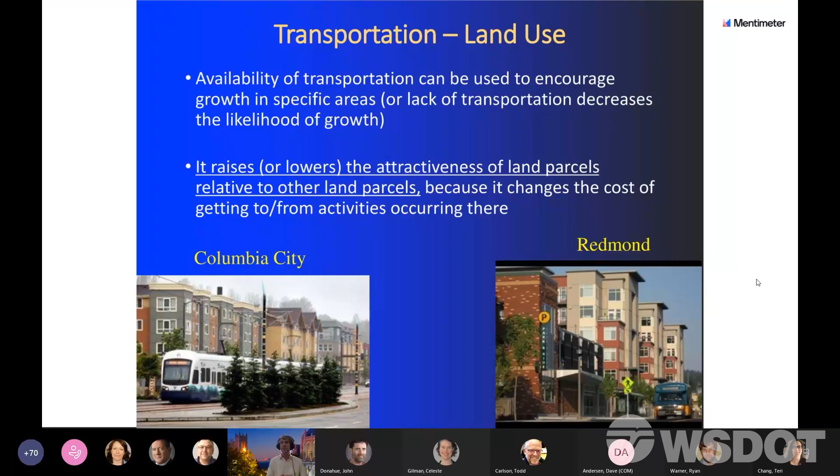So if Sally, who's 8, is trying to go visit her friend Joe's house, who's also 8, how does Sally get there? In the upper half of the green slide, Sally's mother or father drives her, because there are fences — you can't just walk through the blocked-off areas, and the distances are too far. In addition, you probably don't want Sally on what's likely a state route or major arterial down the middle, because it's not a pleasant place for an 8-year-old to go.

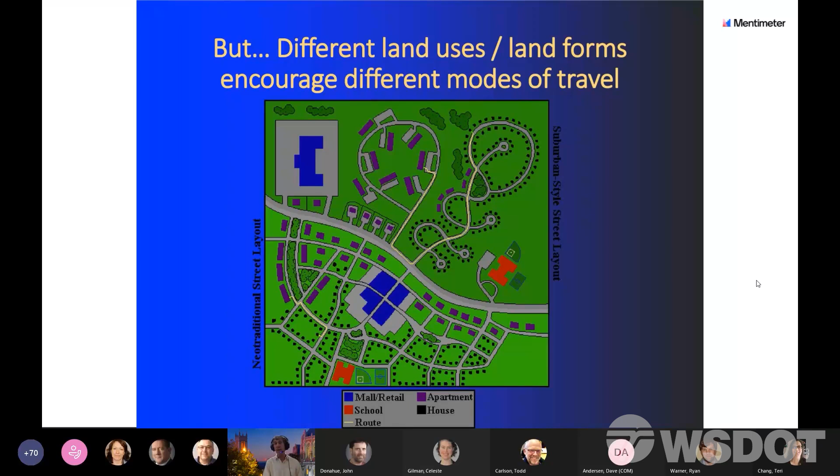So these landforms encourage or discourage particular kinds of travel. And you can look at this from the economic perspective: in the upper half of the famous green slide, all of our economic signals of time and cost say drive. In the bottom half, all of the economic signals you get say you can do anything you want. Matter of fact, the major problem in the bottom half of the famous green slide is cut-through traffic.

Next slide. I love to talk about this, but I won't.

When you take the famous green slide, it's not about density. When you add density on top of it, you change more of the underlying economic behavior. One of the things that happens in dense land use is land becomes more valuable because you can get a lot more money by building stuff on top of it. And so there is no vacant land. You can't say, oh, we're just not using it, we'll park on top of it.

Now you suddenly have to build parking. In the Seattle metropolitan area, it's somewhere in the neighborhood of $100,000 a stall, and people are happy to not do that. So density can also impact our willingness to give up road space.

Matter of fact, this is why we're having this conversation. It's too hard in too much of the state to provide roads, to widen them. Of course, there are major portions of the state where that's still okay. Next slide, please.

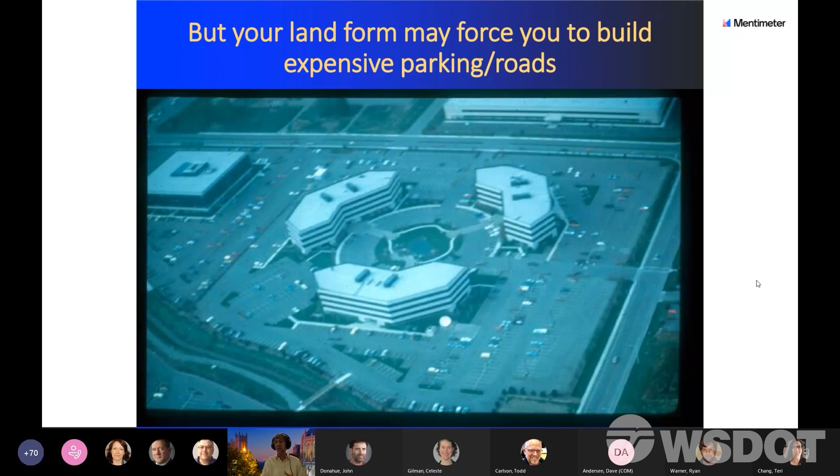Next slide, please. So matching the transportation system, going into that old slide and saying, hey, we're going to make this work for transit—oh boy, that's a tough planning operation, and it's a tough engineering operation. Matching what kind of transportation system you want to the land uses that are there, or making sure you can adjust the land uses and the networks to fit the kinds of transportation you need, is really important.

Somebody earlier mentioned some really good work in the state of Florida. They also, like us, have a concurrency regulation. They've been working on multimodal districts. There's some really good work done by Ruth Steiner at the University of Florida, the Multimodal Transportation Districts and Level of Service Handbook. You can download that off the internet.

And they talk about where these things work, all right? So there are a variety of urban centers where transportation activity can be multimodal, where walking works, where biking works, if you provide the right kinds of infrastructure to make it possible. Next slide.

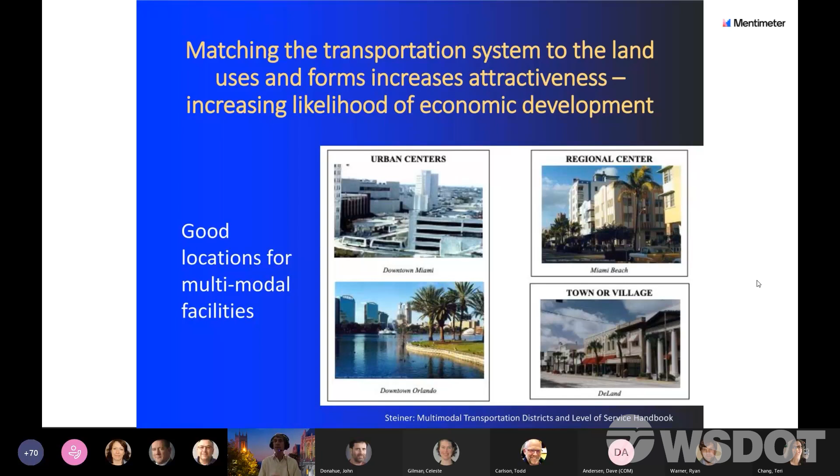There are other land uses where those opportunities are not nearly as effective. If you go out and say everyone is going to bike here because we're going to build this infrastructure, they might not use it much because the distances are too far, or it doesn't feel safe. So as you plan and choose where to spend your money on multimodal transportation, and as you try to discourage single occupancy driving to avoid widening roads that are too expensive and difficult to widen, look to where you can make improvements where land uses are compatible with your transportation options, because not everywhere works.

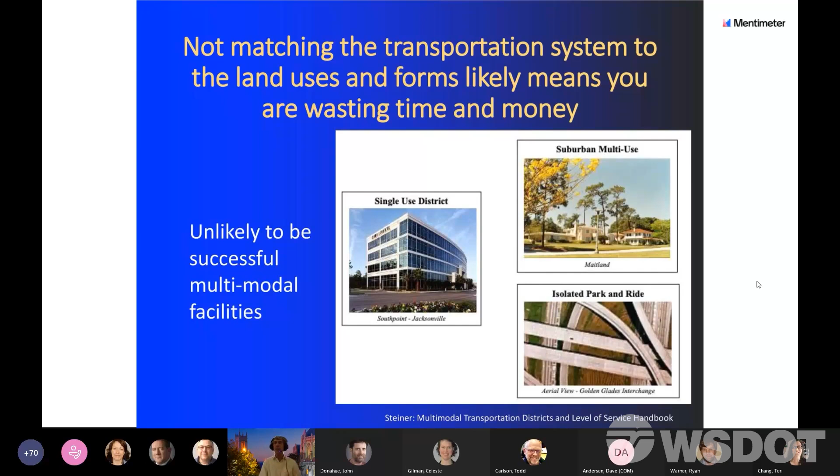A lot of that is driven because everybody is making economic decisions. A key aspect of those decisions, however, is they're not true economics, they're perceived economics.

My favorite example is, do you actually think about what it costs you to drive your car to the grocery store? The answer is no, unless you're out of gas. If you're out of gas, you think, do I really need to make this trip? It's going to be 40 bucks to fill up this gas tank. Let me think about it. I don't need milk today, it's okay, I'll have water. On the other hand, the real cost is somewhere on the order of 55 cents a mile driving, but you don't think, as you decide to go to the store or not, well it's going to be 4 miles, that's going to cost about $2.10. No, that's not how you think.

Because we've hidden those costs, you are acting quite rationally, but only from a perceptual level. So one way we're interested in changing behavior is to surface the real costs of driving. The downside is, if we've built our environment in the upper half of the famous green slide and then go in and charge people every time they drive, all you'll do is get whoever allows that unelected. Because if there's no valid alternative to driving, since you've segregated land uses and don't have enough infrastructure, all you do is anger people and raise the cost of activities they want to do.

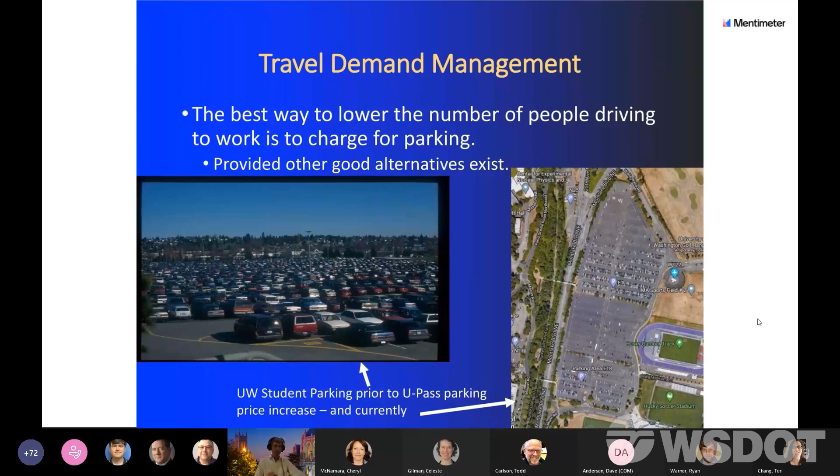I'm almost out of it.

A real question becomes: can you actually charge for parking, particularly when you get away from dense urban areas which are already charging for parking? Businesses resist constantly the issue of charging for parking on the street near their businesses. They fear those costs will make them less attractive compared to their competitors, and that's a real economic fear. They get this connection between land use and transportation.

An interesting aspect that came from Shoup's 'The High Cost of Free Parking' book is: if you give businesses the opportunity to spend the money that's being collected by the city for that parking, suddenly you find a significant change in the percentage of people who are against it. If businesses get to choose to take that money and spend it on improving street attractiveness, cleaning the streets, providing security, whatever raises the attractiveness of their businesses, suddenly this parking price thing isn't a bad thing. On the other hand, if the money goes to the city and they don't see those improvements, it's only negative. They understand the economics of this combination, and the question is how do you use your understanding and theirs to get the outcomes you want.

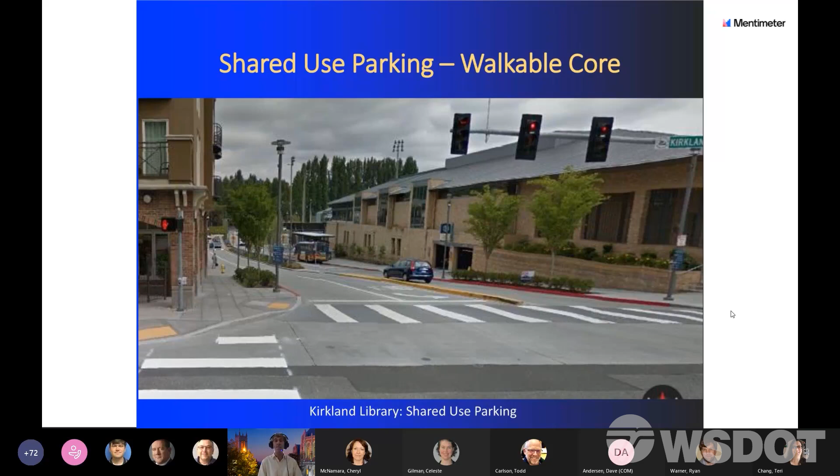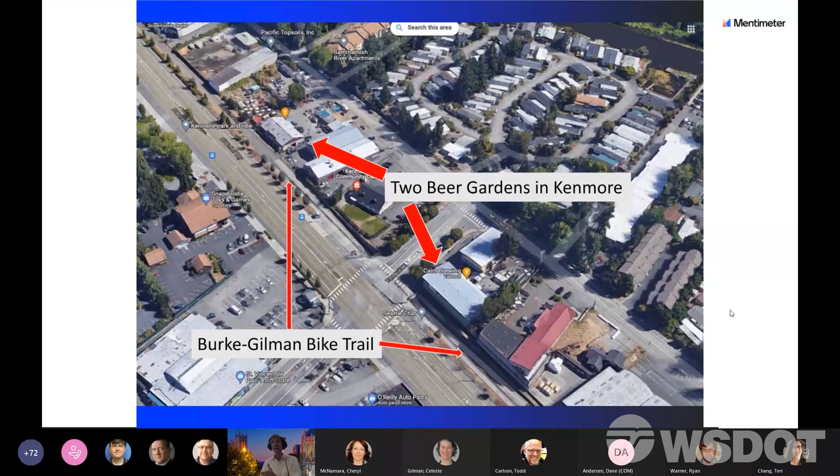So here are the two beer gardens, a destination area next to a state highway, but a great example of what you saw in the Netherlands. It's a separated trail, a really great place to ride—you can ride there, stop, have a beer, have lunch, have dinner. You can use that as a core location in a rural area on one of these cool trails we're building to drive people there. You can put a little parking lot on the other side so people can drive to it as well, and build around it. You can take advantage of these transportation facilities to improve economic activity and sell locally. This is why you want to do it.

So when done correctly, everyone wins. In Portland, where there's a huge emphasis on bike travel, there have been good studies by Portland State showing that bike lanes actually improve economic activity for businesses along those bike trails. But this is Portland—a local area where this really makes sense. If you do this in a small city in rural Washington, you're not going to get the same results, although those opportunities do exist to do cool things along those bike trails.

They had Tukwila actually change land use designations to encourage housing, and they couldn't get the developers to actually build it. The question then becomes, how do you convince builders that this is an economically good thing to do? In the core areas of Seattle, it makes perfectly good sense.

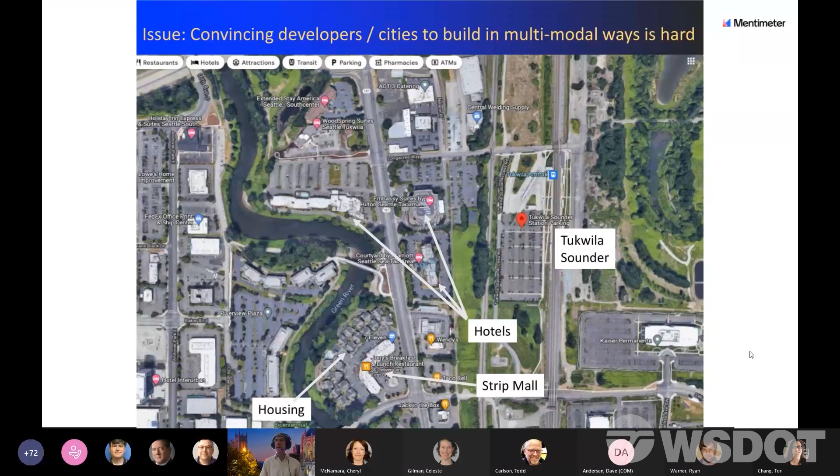Is Sumner interested in building mixed-use, higher-density activity here? Or are you going to take away activity from another part of Sumner that has businesses thinking, wait a minute, don't put in competing economic activity to me? So those are tough planning questions you have to be aware of, driven by existing businesses.

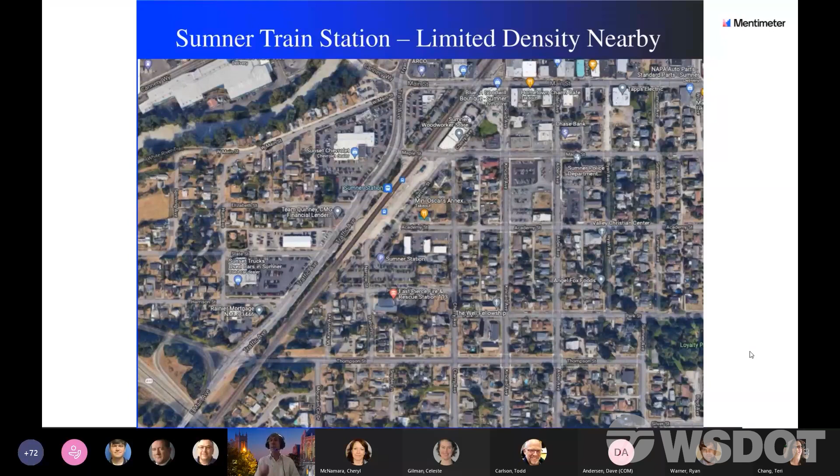I have a son who lives in Mill Creek, and I think, oh, please don't just build housing up here. Put some shopping, put some retail up here. But the core businesses in Mill Creek fight that desperately. So be aware that there are all of these economic activities, and they are very aware of what transportation means for that.

And the Safeway developing guy said, no, we would never do that. Safeway would never let that happen. And my thought was, have you been in Seattle? Your highest grossing Safeways have things built on top of them.

So being able to take people and have those conversations, whether with political decision makers or the development community, understanding what these opportunities are and how they can make money, how they can improve their community, is a huge part of your planning activity.

Okay, and I think that's it. If you go back 20 years ago, Seattle didn't do recycling, and now recycling is in our DNA. It takes time, it takes effort, it takes slow change, but pretty soon you look back on it and go, of course we did that. Why wouldn't we have done that? Because it requires that thought, and that's how we have to get this planning activity out there.